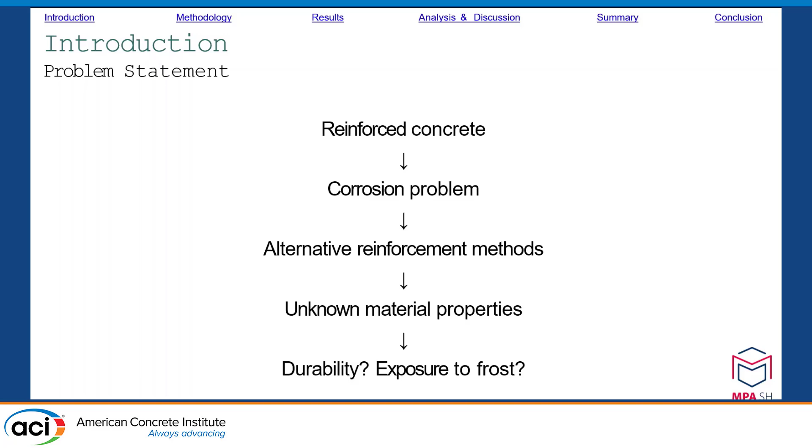Fiber-reinforced polymer rebars are a composite material consisting of fibers and a polymer matrix that encase the fibers, as shown here.

When the rods are manufactured using the pultrusion process, air pockets and micropores can form inside the rod. Water can penetrate the pores and freeze there. The freezing of water leads to an increase in volume of approximately 9%, which can cause further cracks to form and existing cracks to widen. As the number of freeze-thaw cycles increases, the damage can spread.

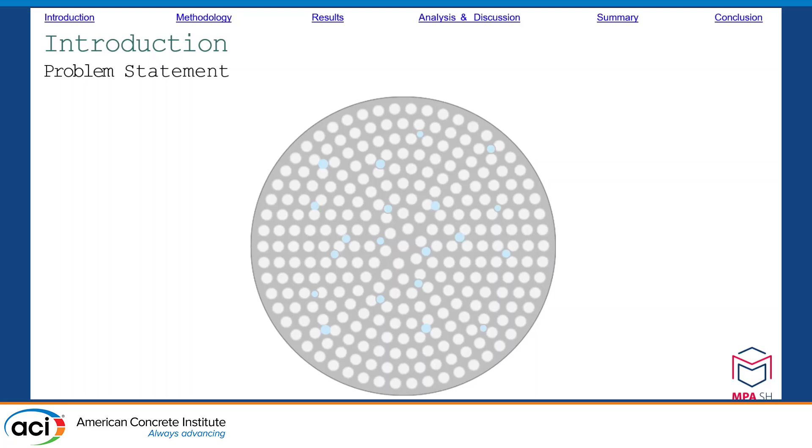The aim of this research work was to investigate the frost resistance of fiber-reinforced polymer rebars and to subject the rods to freeze-thaw cycles for this purpose. In this way, the durability of the FRP bars on one hand, and the retention capacity of the load-bearing capacity on the other, are investigated.

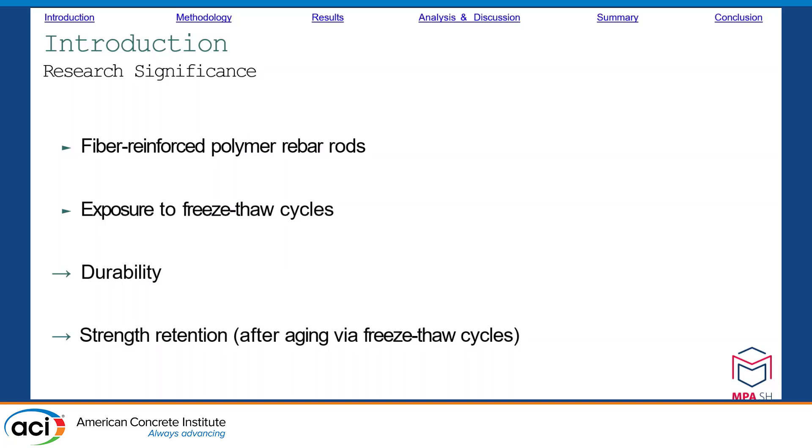Fiber-reinforced polymer rebars made of glass and basalt, each with a diameter of 8 and 16 millimeters respectively, were investigated. The rebars were provided by German manufacturers and therefore differ from manufacturers from the USA.

The following test matrix was used to carry out the tests on the rods in order to obtain sufficient information about the test results in the discussion. The bars were divided into 3 test groups. The first group was not exposed to any freeze-thaw load.

The other 2 test groups were placed in a water bath for a period of 11 weeks to allow saturation of any pores and defects. They were then placed in the freezer for 80 and 160 freeze-thaw cycles respectively.

3 different tests were carried out on the bars after the freeze-thaw cycles to obtain results on the material properties. Tensile tests, as well as tests on transverse shear strength and horizontal shear strength, were carried out, which are presented in more detail below.

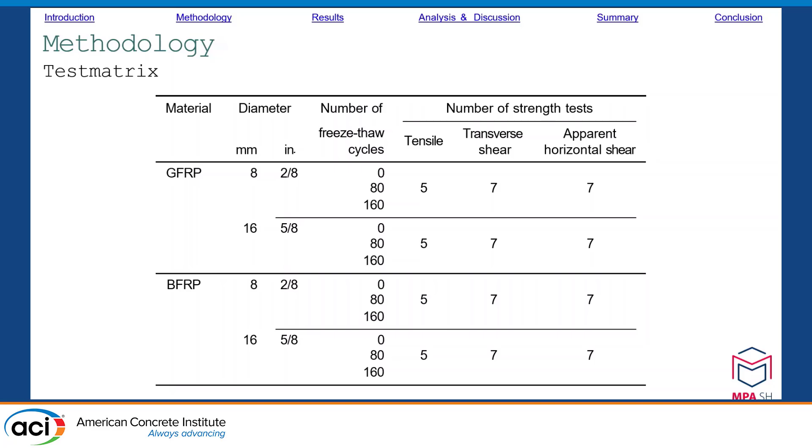Before the tensile test to determine the tensile strength could begin, anchors in the form of steel tubes had to be installed at the end of the test bars. These were filled with an expansion mortar. After a sufficient curing time, the bars were installed in the test facility and tested.

During the tensile test, an extensometer was attached to the center of the bar to measure the elongation of the bar. Before the first fiber break occurred, the extensometer was removed. The rebar was loaded in tension until a complete fiber break occurred.

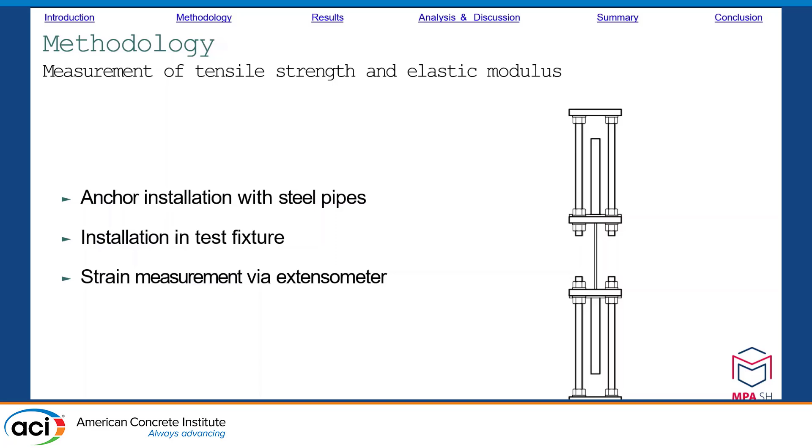The following photos show the tensile test sequence. The third photo showed the first shearing of the outer fibers of the GFRP rebar. The last photo shows the end of the test after all the fibers of the rod have broken.

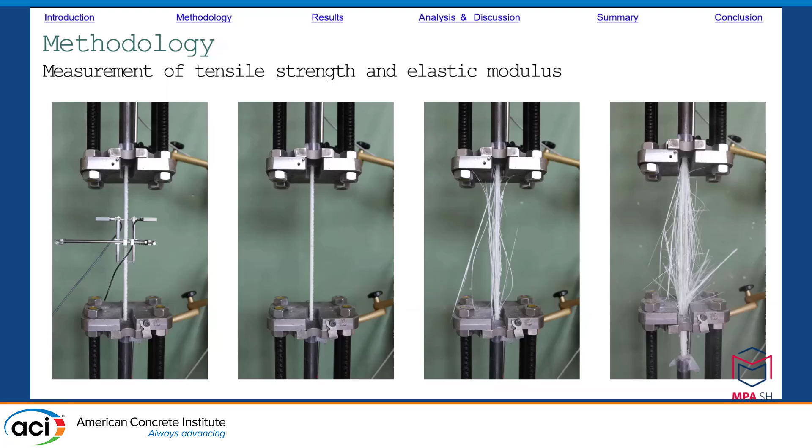The following photos show all samples of the test series with 0 freeze-thaw cycles on which tensile tests were carried out. It is noticeable that the fibers of the glass fiber rebars tear much more finely, whereas whole strands of fibers remain bundled in the basalt fiber rebars. It also happened with the glass fiber rods with a diameter of 16 mm that they were pulled out of the anchor and the fibers did not fail.

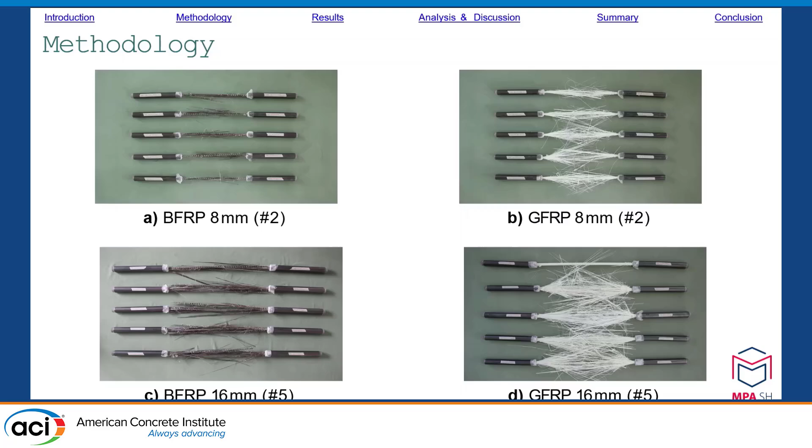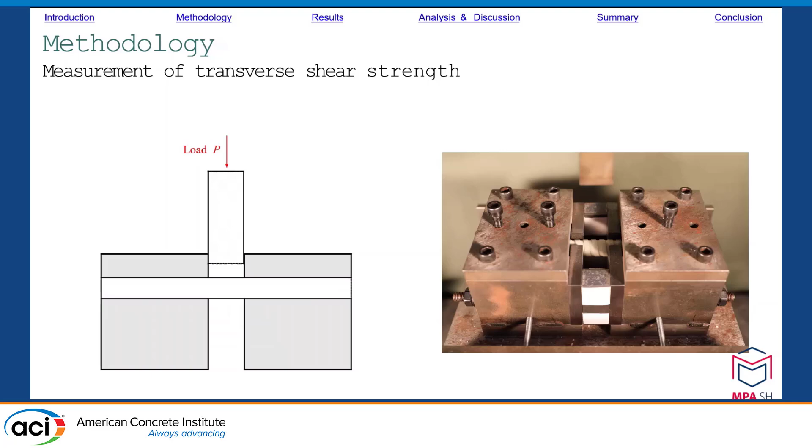To determine the transverse shear strength, the samples were clamped in an appropriate test device and punched through using a pressing blunt steel blade. The maximum force measured describes the shear force required to cause shear failure. The following images show samples of two 16 mm thick FRP rods made of glass and basalt after failure.

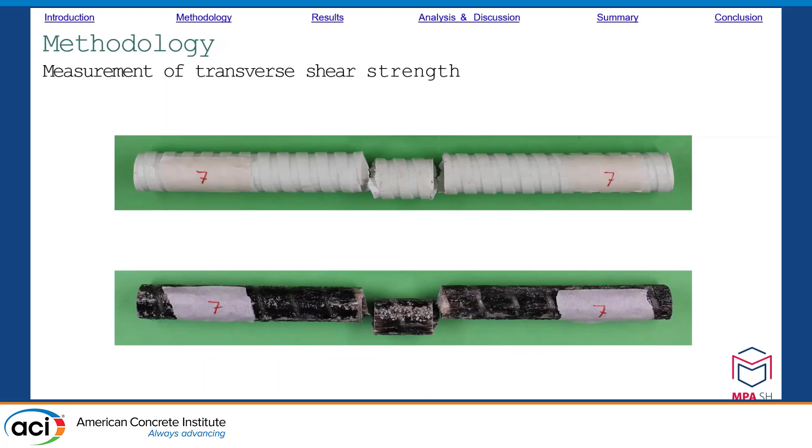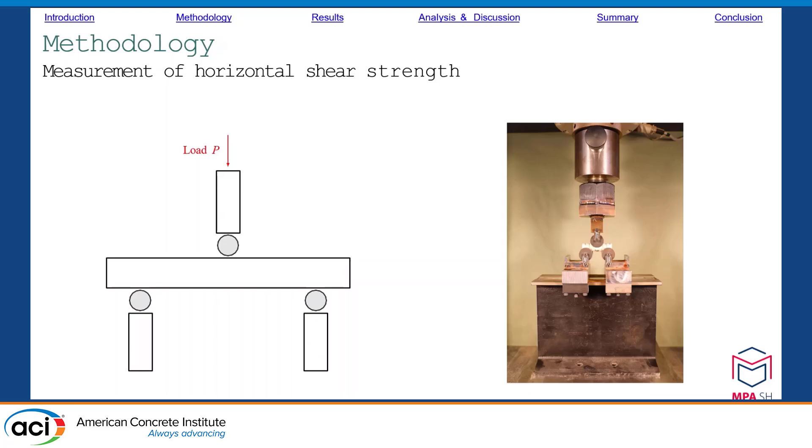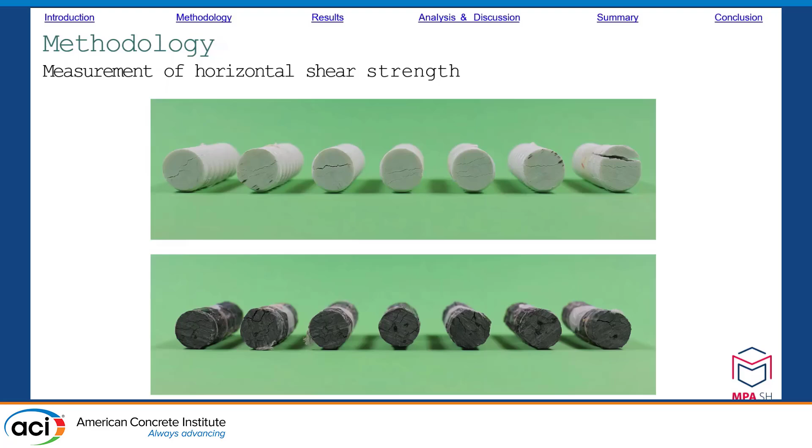The third test carried out was the test to determine the apparent horizontal shear strength. Here, a 3-point bending test was performed at a short span, forcing shear failure in the horizontal direction and parallel to the fibers. The following photos show specimens with a diameter of 16 mm after failure. The parallel cracks at the end of the glass fiber rebars in particular are clearly visible.

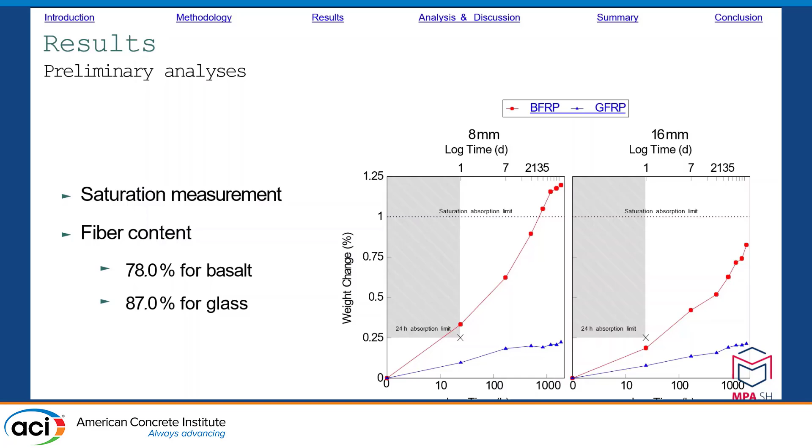The fiber content of the rods was also examined. The investigation showed that the basalt rods had a fiber content of 78% and the glass fiber rods of 87%.

Now we come to the results of the tensile and shear test, starting with the tensile test. This graph shows the result of the specimens that were not exposed to frost. The basalt fiber rods are shown on the left and the glass fiber rods on the right. The rods with a diameter of 8 mm are shown at the top and those with a diameter of 16 mm at the bottom. It is noticeable that the glass fiber rods achieve a higher tensile stress than the basalt fiber rods. In addition, all curves show a proportional increase until the maximum stress is reached, followed by a drop. The samples of the individual groups show similar values to each other.

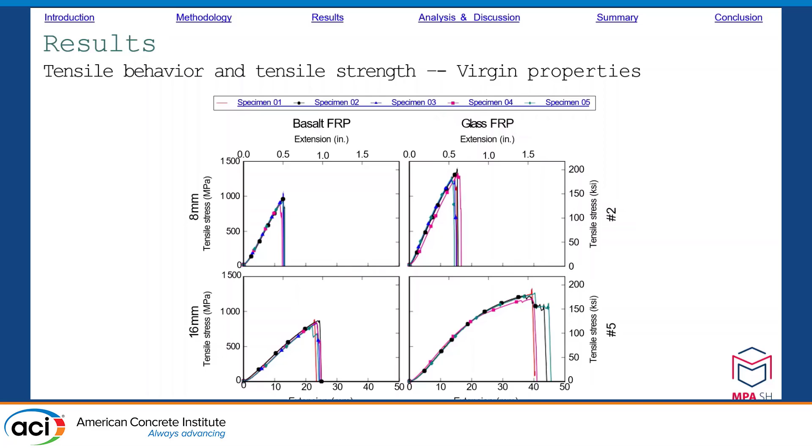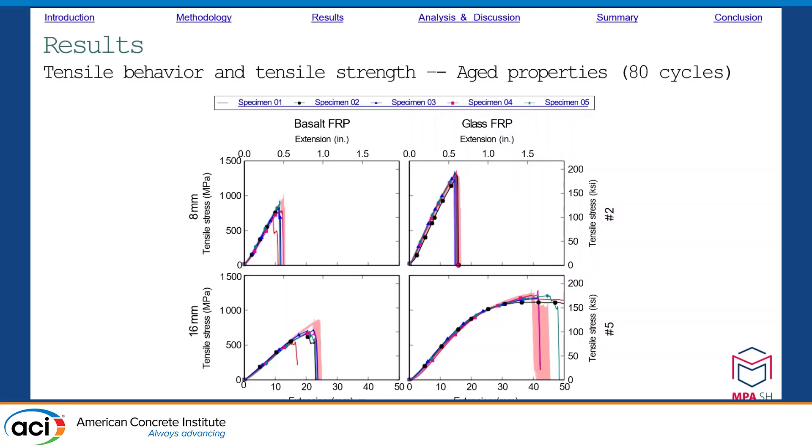The following graphs show the result of the same group after a frost load of 80 cycles. The results of the samples with 0 freeze-thaw cycles are shown in red. In the case of the basalt fiber rods, it is clear that the maximum stress values after 80 freeze-thaw cycles are lower than those that have not been subjected to freeze-thaw stress. For the glass fiber rods, almost the same stress values are achieved as for the samples with 0 freeze-thaw cycles.

The following graphs show the stress-strain curves of the specimens during the tensile test, which were recorded with the extensometer. The modulus of elasticity of the FRP bars can be calculated from these curves. All graphs show linearity, whereby the increase is higher for the glass fiber rods than for the basalt fiber rods, which is why the glass FRP rods have a higher modulus of elasticity. The measured modulus of elasticity for the glass fiber rods was around 66,000 megapascal and 46,000 megapascal for the basalt fiber rods.

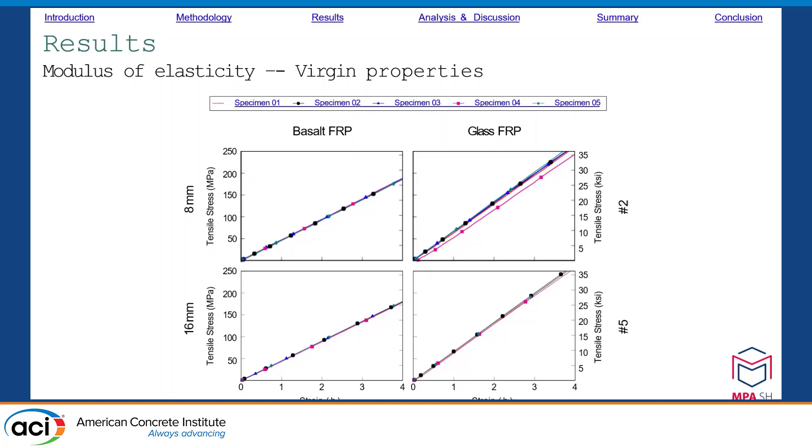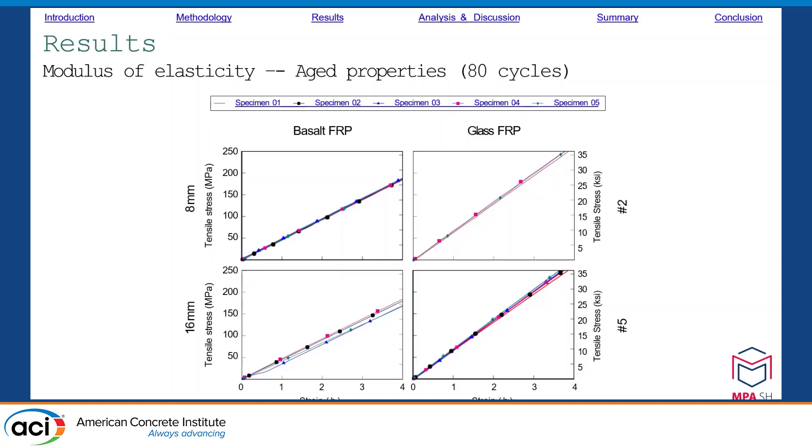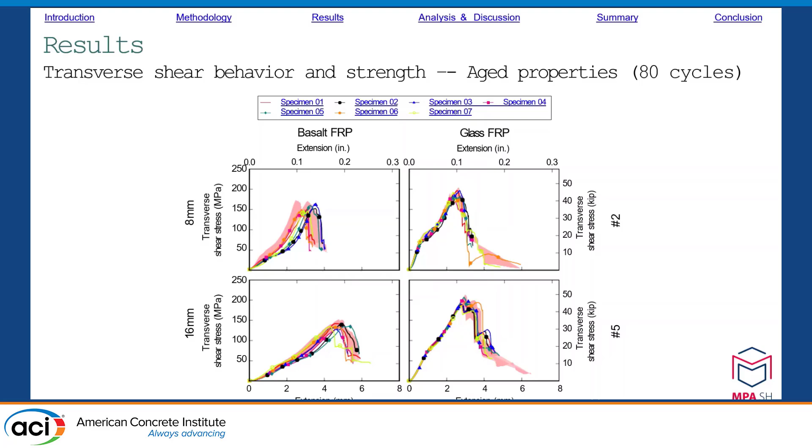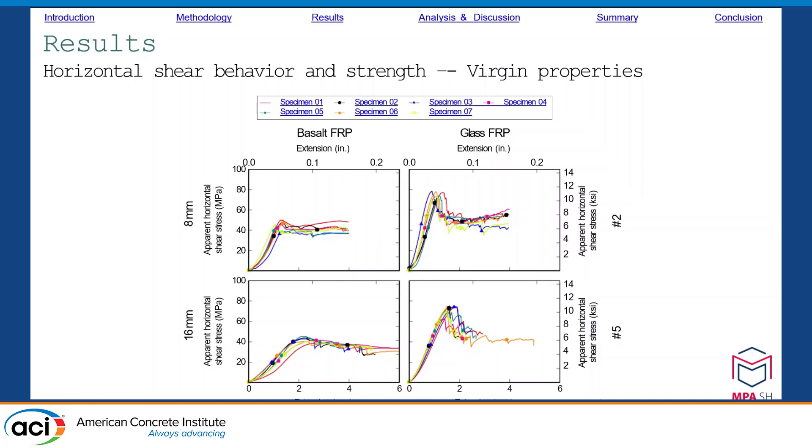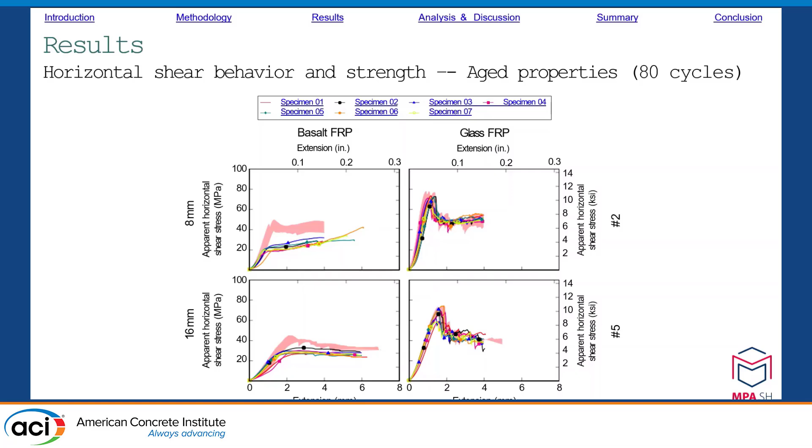The result graphs for the apparent horizontal shear strength also show an increase until the maximum shear stress is reached, after which the graph levels out with no further increase. The glass fiber rods achieve a significantly higher maximum shear stress than the basalt fiber rods. Compared to the batch with 80 freeze-thaw cycles, the maximum stress in the basalt bars is significantly lower, while for the glass fiber rods it is only minimally lower, and a clear drop cannot be seen.

Now I will come to my analysis and discussion.

The following graph summarizes all the results of the three tests just presented, as well as the modulus of elasticity. The results were converted so that the retention capacity of the tensile and shear stress of the FRP bars can be recognized. The orange line shows the summarized results of the modulus of elasticity measurement. Overall, the modulus of elasticity of all test samples did not change significantly.

The green line summarizes the results of the transverse shear strength tests, showing a drop in retention capacity between 80% and 95%. The blue line shows a significant loss in retention capacity of the FRP bars, representing horizontal shear strength, which drops significantly to approximately 65%, especially for the basalt fiber rods. The retention capacity of tensile strength lies roughly between that of the transverse shear strength and the horizontal shear strength. Overall, the glass fiber rods have a higher retention capacity in all tests compared to the basalt fiber rods.

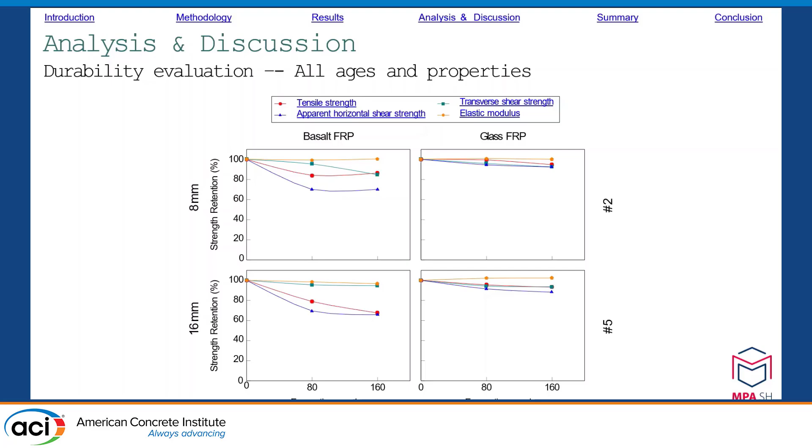Overall, it can be stated that the decrease in strength proves the formation of pores in the bars, due to the manufacturing process. Furthermore, higher saturation leads to greater strength losses. The reduction of retention capacity is particularly evident in the basalt rods, which exhibited high saturation in the preliminary tests.

The test on transverse shear strength primarily examined the fiber properties. As the least changes were seen here, the fibers are not susceptible to frost. In contrast, the test for horizontal shear strength, which focused primarily on the resin properties, shows significant losses due to frost exposure. The decrease in tensile strength is therefore caused more by the poor resin quality than by the fibers.

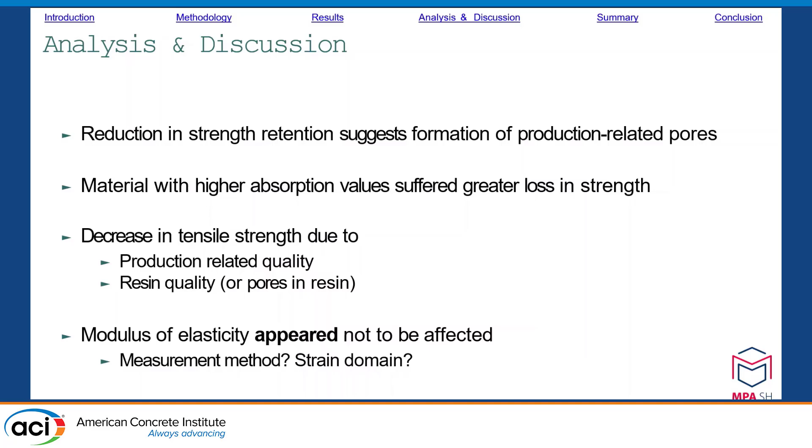Furthermore, the production quality also plays a decisive role here. Better results in the properties of the fiber rods can only be achieved if the resin is evenly distributed between the fibers in the FRP rod. The modulus of elasticity shows no change across all tests between rods with and without frost stress. This is rather due to the fact that the modulus of elasticity was measured by the extensometer at the outer edge of the bars, while the damage occurred inside the bars.

In conclusion, I will briefly summarize my presentation.

A number of 228 fiber-reinforced polymer rebars made of glass and basalt, with two different diameters, namely 8 and 16 millimeters, were tested. Some of the rods were aged through 80 and 160 freeze-thaw cycles. Tensile and shear strength tests were carried out to compare the frost-aged and virgin bars.

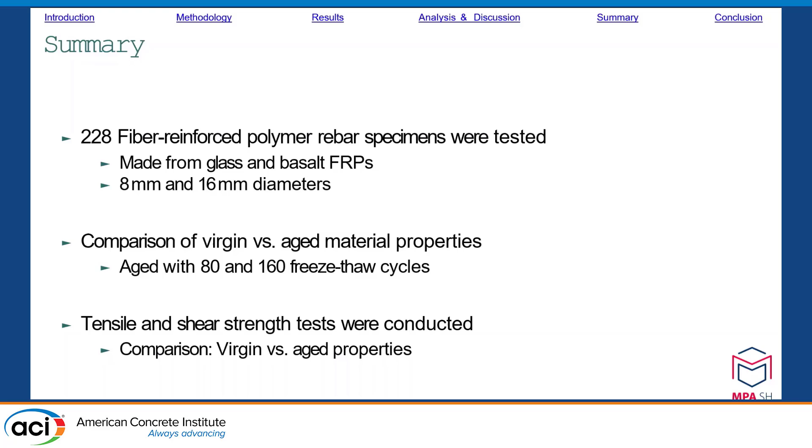In summary, it can be said that freeze-thaw loading leads to a reduction in the strength properties of the FRP bars. This reduction is greater for the basalt rods than for the glass fiber rods. The resin matrix is more susceptible to frost than the fibers. The production quality of the reinforcing bars also plays a decisive role when it comes to frost resistance—the better the production quality, the better the tensile and shear strength properties. The frost load had no influence on the modulus of elasticity in these tests.